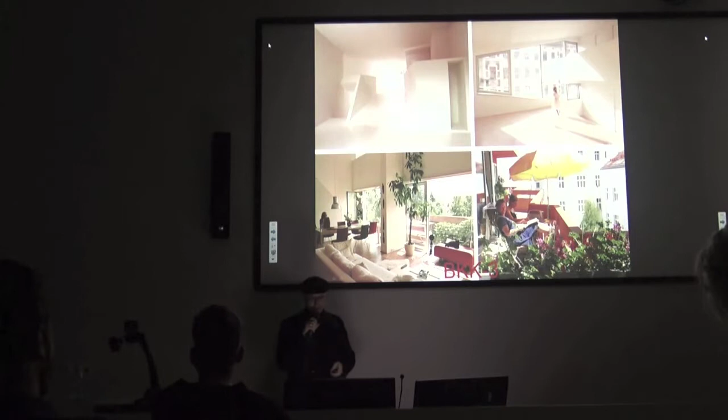So, BKK-3. Okay, so again, it means building collective artist. So that means that we are not only technicians, we are also artists as architects, and so we are trying to focus on things which are not only for function and only for technical reasons. What you can see behind is an overview of projects that we have done in the last years. We have done a lot of housing projects, but also some offices.

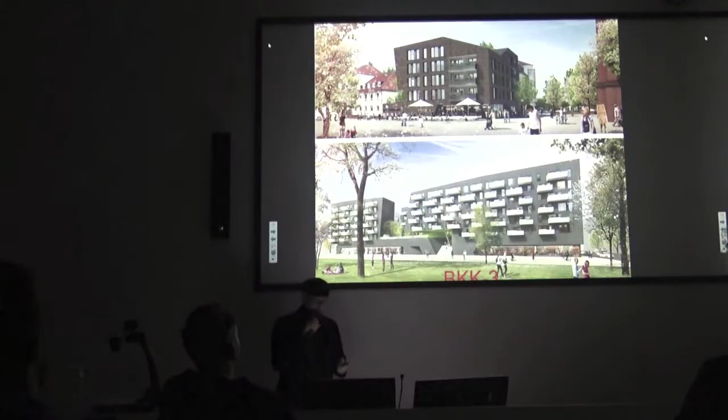So, wohnst du noch oder lebst du schon? This is from IKEA, and in English we don't have words for wohnen and leben, because it's always live. In Austria and in German we have 2 words for them, and it means the difference between only living in your flat or living in the city. And that's the point behind IKEA. And what we are talking about now is to live in participation, to live in community, in communication with other people. So it's about community.

So if you like to develop any project, you need a place, you need an idea, and you need money. These are the 3 points. If one of them is missing, you cannot start with your work. And mostly when the clients come to us, we have a place, we should develop the idea, and the money is then from the client. So this is the triangle which we're working on. And the Sargfabrik, this is our, should I say, famous project of the last 15 years. It's a participation process, a project which we developed together with up to 100 people.

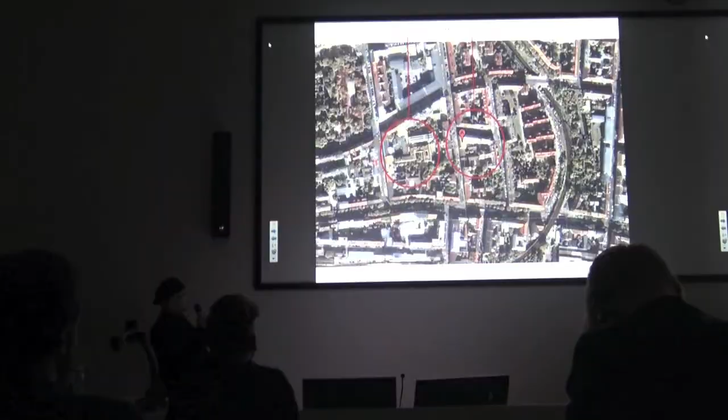Here is the first part of the Sargfabrik, and this is the second part. This is the Sargfabrik, and this is the Miss Sargfabrik, because it's on the Missindorfstraße, that's the address, and it's also clear that it's the daughter of the first Sargfabrik. Altogether, we have spent about 80 million euros.

We have about 110 flats, and the inhabitants, the tenants, are about 220 people. So we are quite a big group, and that leads also to some advantages if you like something from the city, or if you like to do something or to buy something.

So what you can see here is the old Sargfabrik, the first part. It was finished in 1996. Here you can see all these flats are maisonettes, about 2 stories. The next level is then here, and these are also like single houses or row houses sitting above. Then this is a bridge leading to the other part of the Sargfabrik.

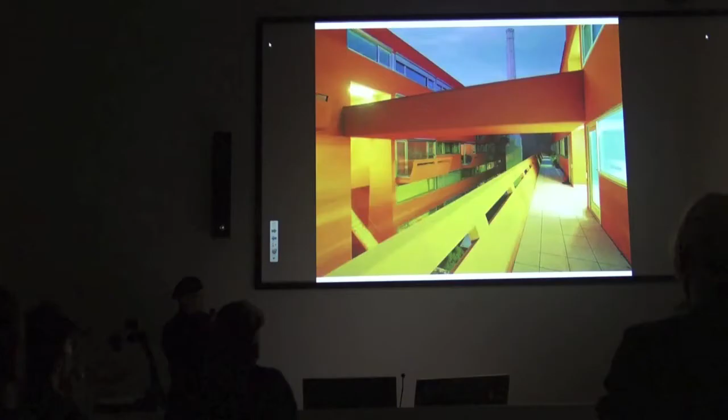So you can see here, this is a picture—please remember, I think this was in the first year when we moved in. I will show you the pictures after 10 years, how it changed and why. You can see here in the back, this is the chimney, the last old remaining thing we have there. So this is the Miss Sargfabrik.

This is the second part. It was started in 1998 and finished in 2000. So we had only 2 years for the whole planning process with 50 people together, and we learned a lot from the planning process of the first part, to do it better in this second part.

So what is interesting when looking at this section? It looks quite simple, but you can see a sloping floor here, and also here. That was the idea when we spoke with people from the old Sargfabrik. They told us the maisonette is so high, about 5 meters, with a big void inside—50% is a big void. They said that's not social, let's do something more compressed.

So we thought it would be a good idea to compress it by 70 centimeters and raise this up. So we have here 3.20 meters and 2.26 meters in the back, the same as in the old Sargfabrik. We compressed the box we had before, and that leads to this sloping floor.

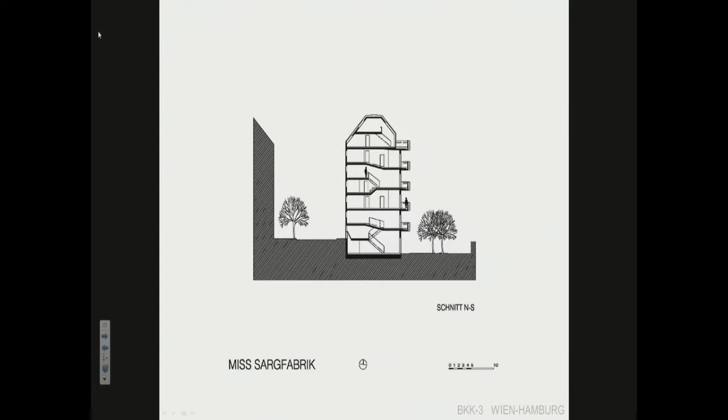The decision is a decision which we made together. And then we did it also here because everybody was happy with the last floor. It could be happen here also. And so that's what was the way to come to such a crazy idea into realization together with the people.

Then we had this idea not to make this dividing walls straight. One of them we broke, so you have 2 atmospheres. The one atmosphere, like here, is a big void in the middle, or big room in the middle, and here you have a space here and a space behind. You can see here you have 3 meters of glass wall, and here you have 6 meters. So they are completely different. When you're sitting inside, they are completely different.

It's like if you have Kochtopfdeckel, you know it, you will ever find somebody who likes this. So that was so funny that at the end everybody was loving this part or this part.

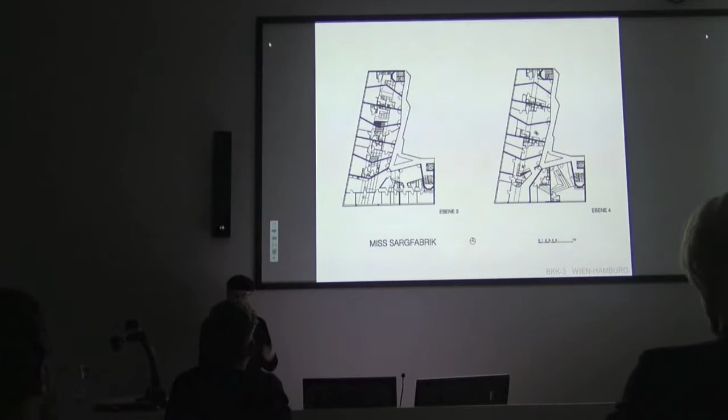So that's what I like to say to you. Diversity is good for all the people. So together with the sloping walls and sloping broken wall and sloping floors, it was a 3-dimensional thing which we could not describe to them.

But first of all, another thing, because the client, our client, the association, likes to have some flats which are very small. And the first which we did was this one here, 50 square meter, single room, loft. Then here, for example, 50 square meter, 2 rooms. Here's one room divided and the rest is open. And here is also two rooms flat, and here we have a 3 room. So 50 square meter and 3 rooms. Who likes to have something like this?

We know it because we got so many inquiries from ladies and single moms because they like to have a cheap flat, but they like to separate from their child, and it's possible here. So the overall rent is about 300 or 320 euros for this, and especially single moms don't have so much money. So they came to us like hell.

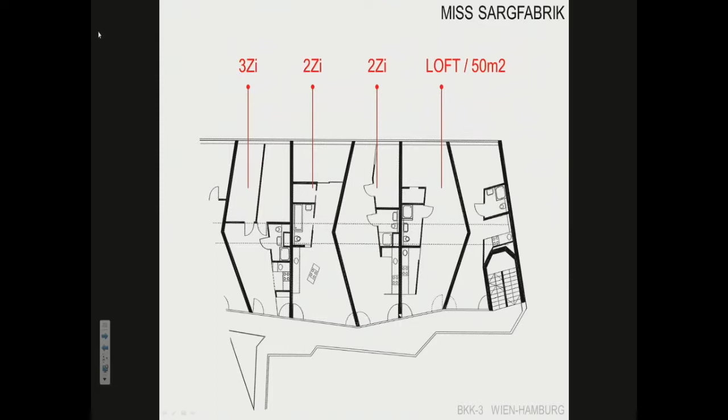So we decided to make an advertising in the Falter, which is the Viennese event magazine, and we gave advertising in it. Miss is searching or is seeking for men because we have too many women. So that was the next funny part that we had when we developed this project.

So when you're thinking about all these sloping floors and walls together, you can see here the overall section, the 3-dimensional, but here you can see how it was the impact on the flat, on the room itself. And it was not so easy to talk with people who never had a study of architecture. When we talked to them, it was not so easy to tell them how it will work.

So we built up models, models that they can look into it, and we have to decide also the floor planning with them. So here you can see maybe one of the flats.

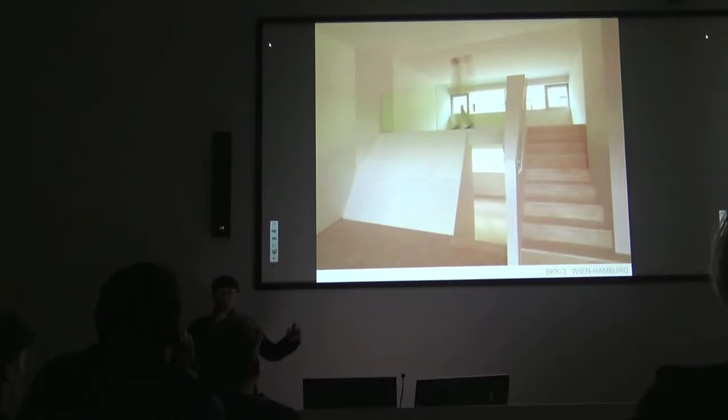We talked with everybody about every flat. So there were about 40 flats, and we have 3 meetings. So we have 120 meetings for this project, and every meeting, let's say, in between 1, 2, and 3 hours. So it's quite a lot of work and quite a lot of discussion together with all the people until we came to the end that this is a project which is fitting for every user.

So every single flat is diverse. We don't have any flat which is the same as any other. And everybody is proud of his own flat, and that's what I always think about diversity, it makes you maybe a little bit more broad about your space and your area where you're living.

So here, for example, you can see the sloping floor is with parquet, but we also have sometimes terraces. We have in the planning process, we had a lot of ideas from the tenants to use this area. This is a flat which is in the upper floor, in the roof. She was very open to architectural ideas, and so we built a lot of models for her.

And she liked to live like on, let's say, a ship. And what you can see here is then everything is done with the Trockenbau, with gypsum plates, and yeah, it's quite an interesting flat. This flat is the one which goes to the Missindorfstraße directly. So you can see here this big space and the big window, and here you can see the principle of this maisonette, which is up here about 75 centimeters, and down here from the ceiling to this part also 75 centimeters.

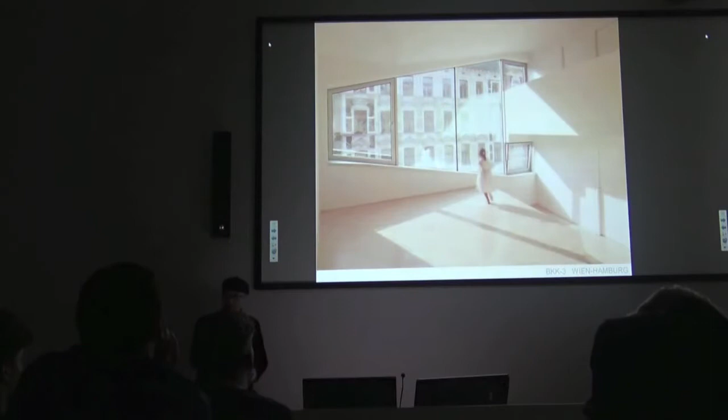So on the outside, we thought all these flats are now like a landscape, and we could do also landscape on the inside. And the special topic here is we are under the earth. You can see here the flat, which is about 2 meters under the earth, and how can I go there?

So we were thinking about a landscape which you can go down. This is the part for the handicapped people, they took this way. This is 10%, this is also 10%. And here is the lift which is leading them up.

This is maybe also interesting because this is a bridge. It's a kind of shortcut, because first we had a development situation which goes around the complete corner, so everybody living in the last flat had to go by in this part here. So then we had this idea of making a bridge which divides the people, so 5 flats are going there and 5 flats are going there.

This is the club room, and you can see it's red painted. We've also designed and integrated a bar. So you can go there, bring your beer, you have water and a refrigerator, and you can start a party. A lot of people, teenagers and inhabitants and non-inhabitants, have been celebrating here the last 15 years.

So when we're going up into the best location, there's the laundry, and the laundry also has a design. Normally you're just putting the washing machine there, but we were thinking about a story: when you're washing your clothes, you go there first, put it in, then you can go up into the library to sit down and read the newspaper. Behind or above the laundry is the common kitchen, and there you can go for a coffee, a cup of tea, or whatever.

So this was the story behind all these sloping ways which are going up. Here we have now 27%. It's not allowed in Austria, and I think in Czech also. So we had this idea, what can we do with that?

So we say this is a sculpture. It's a mountain sculpture because it's so steep, and we brought this into our plans. Then our authority was sitting there wondering what does it mean, a sculpture? And they didn't find something to forbid it, so we have it now.

A lot of children use this ramp for sloping down and running down, and fortunately nothing has happened in the last 15 years. But this is the internal shortcut in between the library, and all the facilities or functions are seen together. They are divided by walls, so you cannot smell the laundry, you cannot smell the kitchen, but you can see everything.

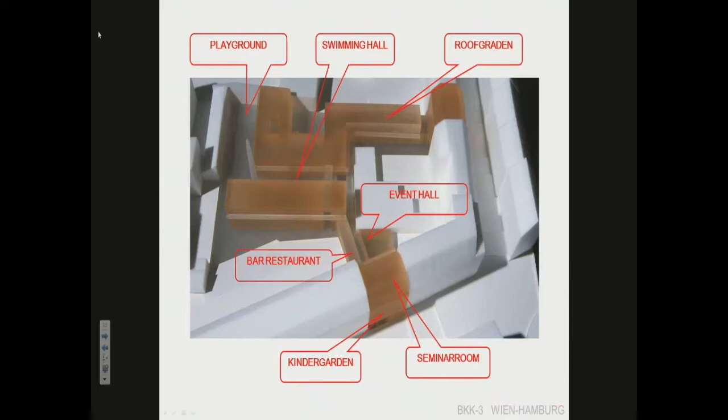You can see here we have a kindergarten, we have a seminar room which is about 200 square meters, we have a restaurant with 300 square meters, we have an event hall for up to 500 people, so that's really a big program which we can run there. We have a swimming hall with 300 meters, there's a playground, and up there's a roof garden, which is one of the interesting common rooms that we have. So, let's see it in detail.

And here is the Schwimmhalle, the swimming hall. The swimming hall is open to 500 people, which are club members. So we don't have the money to have a professional team there. So we say to all of our club members, you have to be one director of the swimming hall, you understand? So we don't have a director, we have 500 of them. And if somebody has to be rescued, everybody can do this. So we don't need an overall overview of this part.

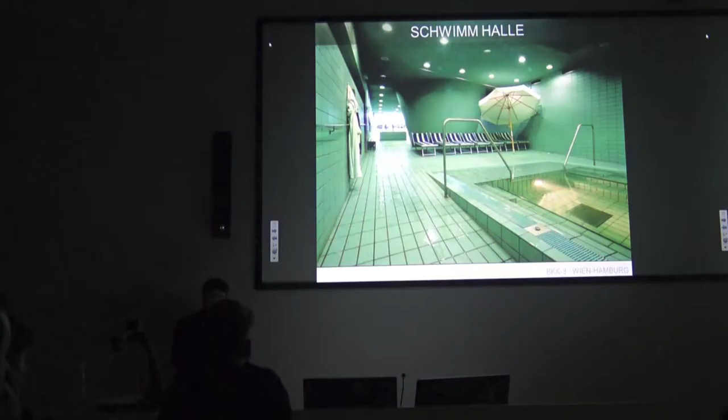So the next thing is then the event hall. The event hall is run by a professional group. We have about 20 to 25 events per month. So we have events every second day or every day, which is quite a lot. Usually you have 10 events per month. And this is run by a cultural manager. He brings all the bands and all the people to us, and you have to pay for that. But we are also getting subsidy from the city of Vienna, like every event hall in Vienna.

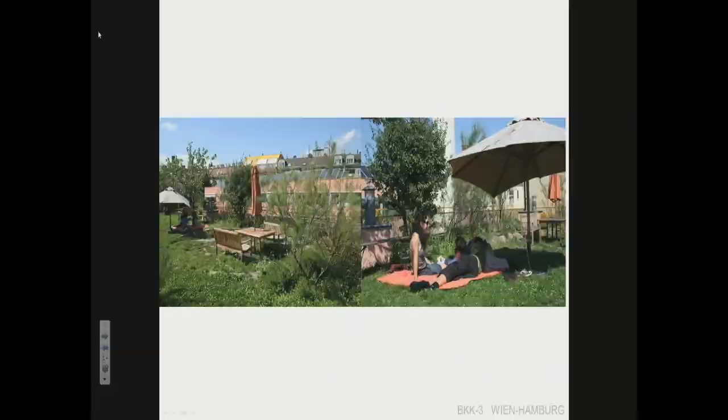And that's a picture from above how it is today. It's completely filled up with the green area, with big trees. They're about 6 meters high and on 30 centimeters of earth, not more.

You know what Feierabend means? It's a kind of celebration every day when you're going from work. So we had our first celebration on the 1st of November, which is a very special date. In Mexico, they are celebrating at the graveyards with the people who are dead. And that was our idea when we made a celebration on the 1st of November.

So this is one of the old coffins that we found in our Sargfabrik. We have it today, and there was a big event with musicians from all over, celebrating in the Mexican style the first day of the Sargfabrik.

So what are the principles, to make a summary? We have bottom-up decision making, because everybody can join the planning process. We have responsibility. Everybody has responsibility for the whole when he makes decisions. We have voluntary rules, so we do not force somebody to do something. They are all doing it on a voluntary basis. And we have cooperative property, so it's not the ownership of somebody, it's the ownership of the whole cooperative. That's one of the principles.

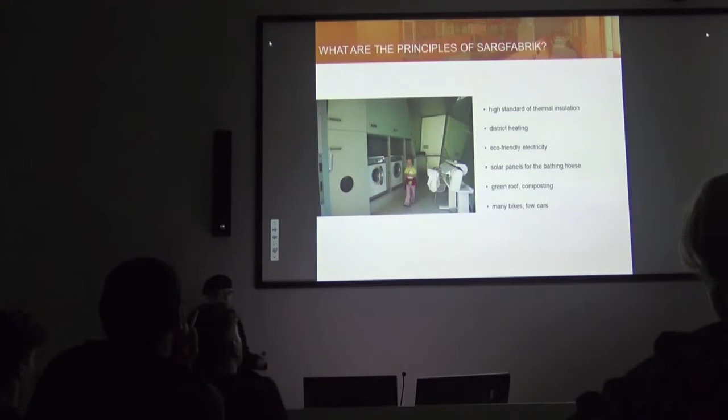We have our own composting system, and we have many bikes and few cars. So I think we are very sustainable, and we are also giving something back to the city with our public common rooms. That's what we think is good when we're getting a subsidy from the city: we like to give it back in another way. So we like to integrate a lot of people and spheres.

We are open to refugees, we are open to every part of society, but today we are of course closed because we cannot expand anymore. We cannot build a skyscraper, unfortunately. We have a lot of inquiries, but we haven't found a place to expand. And we like to integrate these separate concepts of participation, planning, and avant-garde aesthetics, which can be merged together.

So we're coming back to social housing again, but I would like to introduce a small single-family house for a friend of mine. When you're planning for a friend, it always means you have a lot of responsibility, and most friendships end after the planning process. I don't know why, but it is so. In this case, he is still my friend.

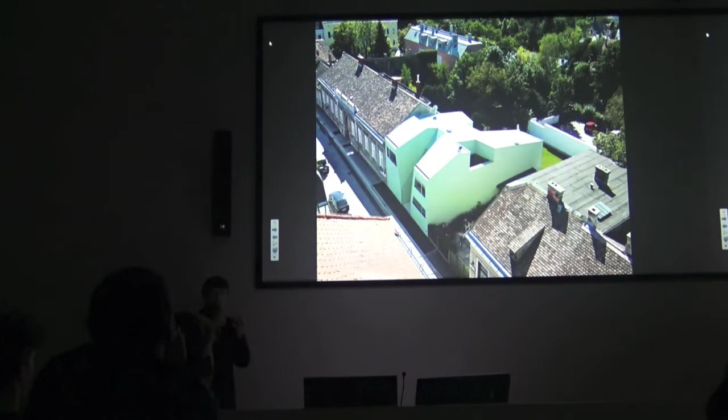So they were very in favor with this idea, because we have found an old structure which was in the city before. So this is the way then through. It's a small, narrow way which leads to the door. And on the other side, you're coming out here. So you have on the left the living room, up there are the sleeping rooms. This is a room for the parents, and up there is the sleeping room of the owners. It has about, I think, 240 square meters overall area.

And on the inside, the lady of the house told us she liked to have something where she can oversee everything which happens on the street, in the house, and in the garden. So when she's here in the kitchen, she can see on 3 sides everything that's happening. So we fulfilled her wishes that she had.

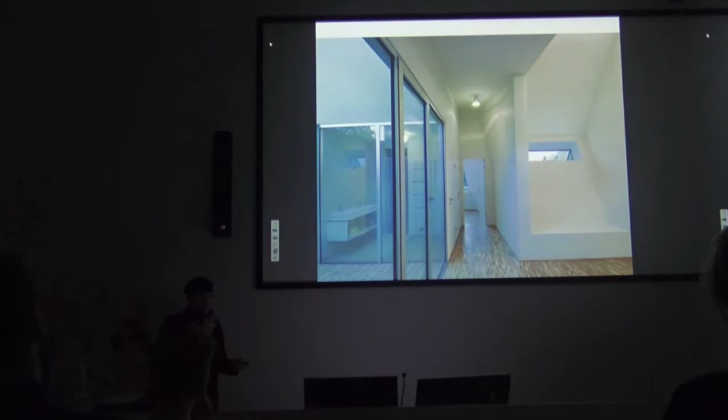So in the upper floor, they didn't have any wish for this thing you can see here. But at the end, we were using this as a library. Now there are the books inside, and it's the in-between connection between the 2 parts of the building. So this is the way looking right to the street. On the left, you can see the bathroom, which is into this inner courtyard. And so they have a lot of light and a lot of sight and transparency when you're coming up into the 2nd story of this building.

So that's the front. Also funny story, when we built this up, the neighbors were coming to us and asking us what are we doing here? This cannot be a house, or what is this? And then I told them this is for a family. And then the neighbors said, "Oh, okay, now I understand. So when they get divorced, the one will get this part and the other one will get this part." So people have such pragmatic ideas.

So let's go to the Vorgartenstraße. The Vorgartenstraße was finished in 2012, so it's quite a new project. And the aim that we had there was to have a cheap rent. It was a competition. It's called Bauträger competition in Vienna. So you go in with one association or with a cooperative into the planning process, and then you're presenting this to the city. And the city has a jury and will judge the best project. We have won this because we have a lot of quality.

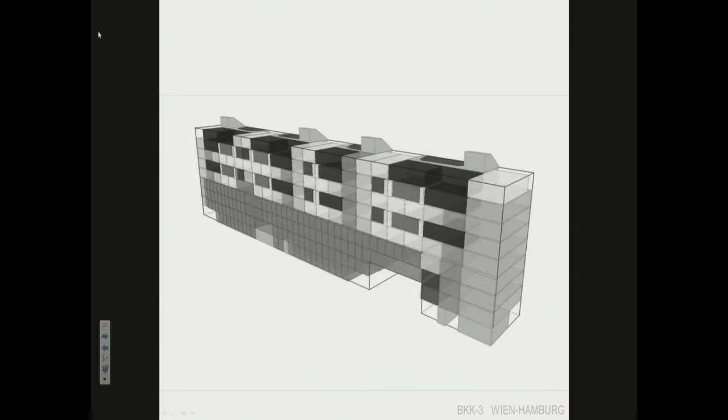You can see they are quite different because it's a very complex system of flats. All the flats have orientation to the south. Most of them stick through the whole block, and they have a big area in front of it.

So the average size of a three-room flat in Austria is about 75 to 80 square meters. So we thought the only way to lower the rent is to compress the floor plan, to compress all the functions, and that leads to this flat, which is now 66 square meters, maybe 10 square meters less than normal, and that means you have less running costs, you have less rent, and so I wrote down what you have to pay.

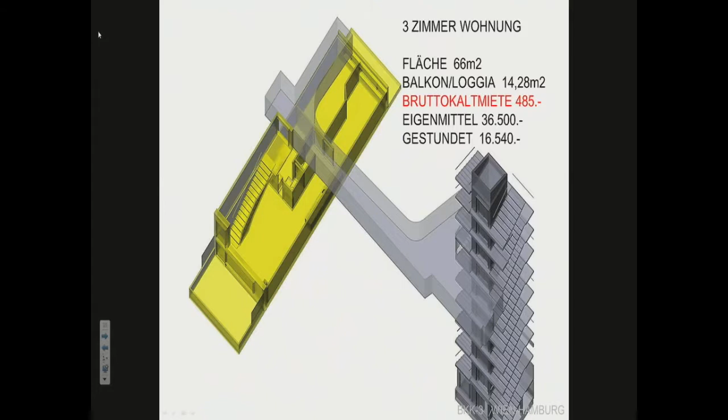The Brutto-Kaltmiete, that means the overall rent with all the running costs together, but not with the heating system, is 485 euros for a three-room flat. You have to pay Eigenmittel of 36,000 euros. You will get it back when you're moving out. That's quite a lot. But it can also be deferred, gestundet, then you have to pay less, and you pay it later on.

So, 66. We know from the Sargfabrik that you can do something with 50 square meters also. You can do a three-room flat with under 50, and there are a lot of people who like it. So we decided to do this again, like in the Sargfabrik. So here we have 52 square meters for a flat which has 2 completely normal rooms. This is for the children, this is for the parents or for the single mom. And here you have kitchen and living together, which is not so big, of course.

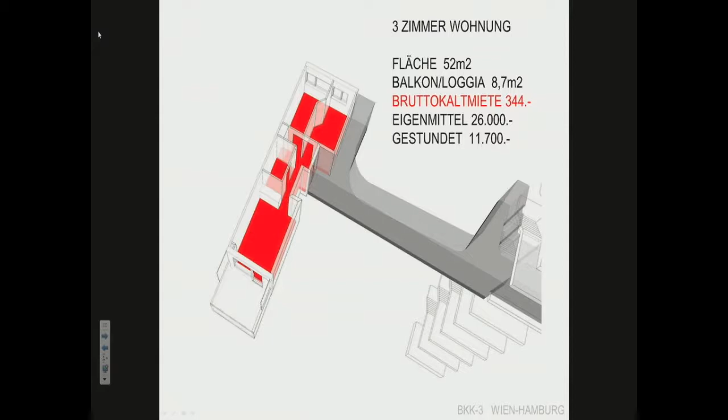But you can see here, this area is up to 3 meters, and that's quite a lot, which is in direct connection with your flat. And you're paying 340 euros for that. And of course, Austria also has some poor people, and they need it. So these flats were rented out in 1 or 2 days. So there's a need for this special situation.

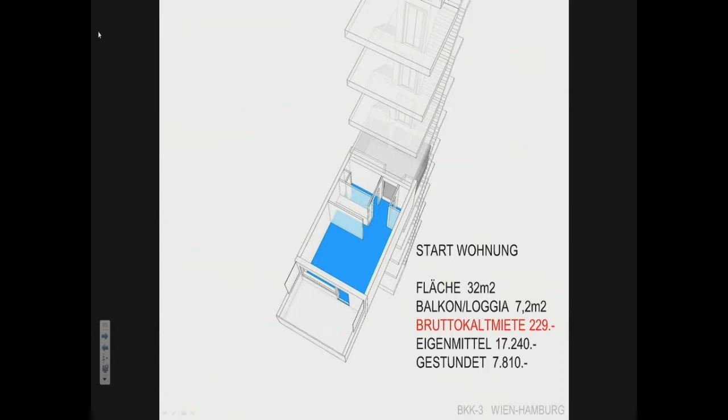And then we had to do the Startwohnung, the start living unit, which is for students or for young people who don't have so much money. So this is only 32 square meters, and it's only 229 euros. So this is comparable a little bit to the student's home. Or it's less than a student's home, but in a student's home you have a cleaning lady, you have internet, you have the big kitchens and so on.

So additionally to these flats, we decided to make what we called working spaces. The working space is just opposite the flat. So what you can see here, the gray area is the entrance to the flat. And on the opposite side, you will find these two working spaces. You can use this for your hobby. You can use this as your office.

You can use it for your teenager, to put the teenager away 2 meters. And the teenager can come for eating, but they have their own single unit, which is directly by the parents. Sometimes it's better. So you can use it for everything you like. It's additional. You can rent it additionally to your flat. They were all rented out immediately.

We have about two of these per floor, and on one floor we have 8 flats. So for 8 flats we have 2 additional rooms, and they are very cheap. It's about 100 euros. Of course they are very small, and you can see here this is the bath facility, and the rest is just an open space. So you have a toilet, you have a shower, and you have a washing facility, and that's enough to put your teenager there.

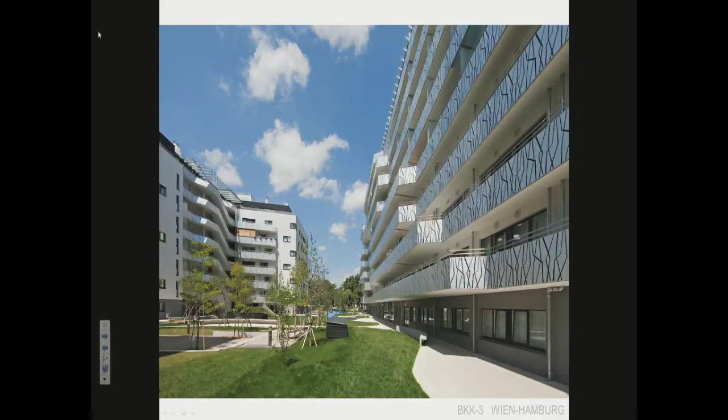So how is it going to look on the outside? The whole building is 128 meters long. It's divided into a building which is standing alone, and this one which runs along the street for 120 meters. So we thought about how we can make a sculpture out of the facade, and this leads to this form of balcony, which is coming out and going in. So here you have 3 meters, there you have 1.50 meters. So it depends which flat you get, how deep your balcony is.

Up to the 4th story is the student's home. So you can see here on this side where it's a little bit wider, we have the common kitchen. I will show you a picture there. We worked together with Dr. Karin Standler. She has done the landscape plan, which is of really good quality. Also now, after 3 years, it's getting better and better.

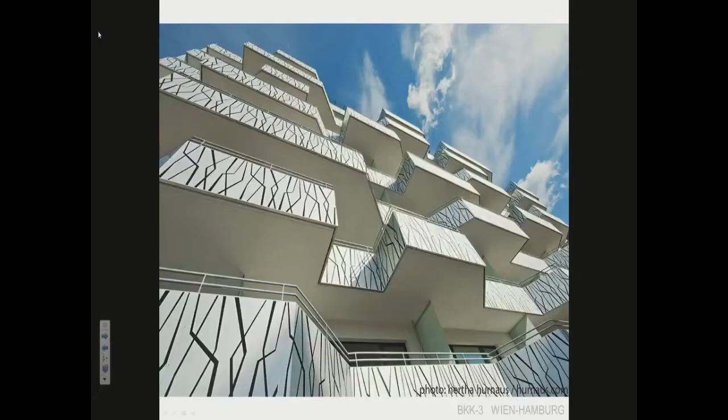This is the south elevation from the part which is standing alone. You can see here there are a lot of different balconies. So each flat has a 1.3 meter part. That's why the sculpture is so moving.

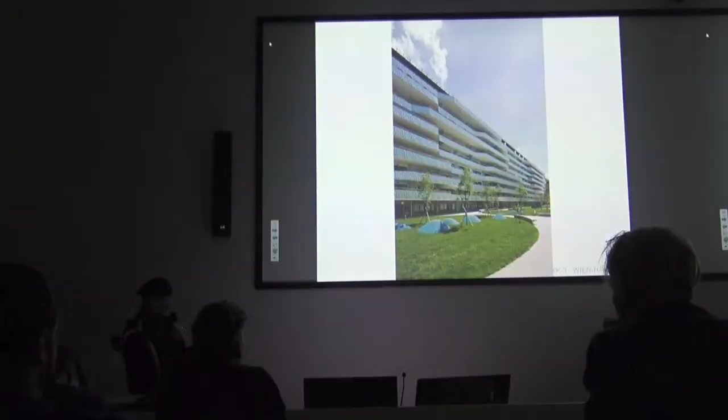Nowadays we have big trees there. This is also a very nice photo where you can see the shape of the form and the shape of the landscape. So here is the sand. There is a hill which is 3 meters high, and you have to think about it that behind or under this earth there is the garage. And when you're putting 3 meters or 4 meters of earth above, then you have to do something in the garage, because it's really quite a lot of tonnage of earth.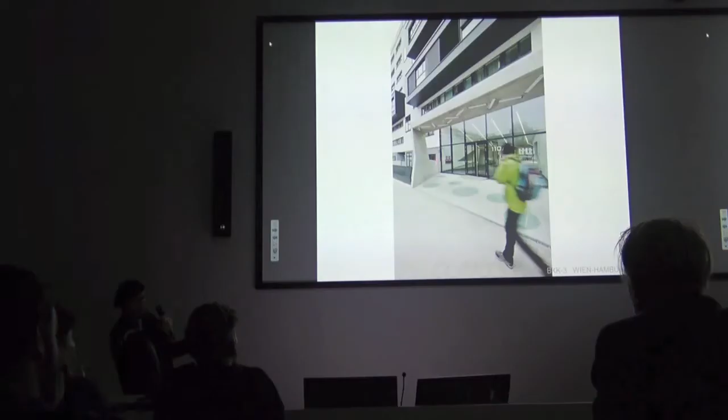Yeah. So now we're coming to the student's home. This is the entrance. The entrance for a student home can be a little bit better, a little bit more beautiful, a little bit fashionable. So we decided to do this 2 stories high when you go in, and then on the inside it goes down to the normal height.

So we could spend a little bit more money than normally in this space, but we had to fight, for example, for these lights. They cost about 10,000 euros, and we had to go to everybody to talk about this 10,000 euros, and the whole project was 22 million. And after 1 month of lying on our knees, we got it.

So then we had this idea: what can we do for the people to sit down? And we had this idea to copy our column and to put it down on the earth. This is out of metal, because it's not possible to do anything which is flammable. It's a question of fire protection. And so we did the place to sit down in the same way as the column.

Here is the lobby, where the housekeeper is inside there. And that's, I think, the Visitenkarte of the building. When you come in, you should see the philosophy of the house. So, how it's going to look like then above in the student home.

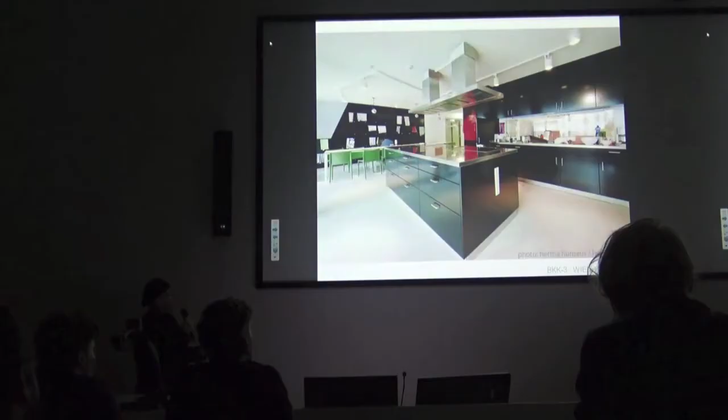We have a big modern kitchen everywhere. They are very open, very transparent. They have a lot of light inside. This is the washing facility. Behind is the kitchen itself. There are the storage rooms of the students. We have done all the interior design.

Then when the offers came back, we had 1.5 million of interior design, and our client told us 1 million is the maximum. So we had to decide then how we can save 500,000 euros, and that leads to these black plates, which were much cheaper than the white ones.

There's every luxury thing inside. Big flat screen TV. I think there are 3 ovens there, more microwaves, and everything you wish.

This is then one of the rooms in the student home itself, and as you can see here, we saved this plate. We left it away, and I think it cost about 50,000 euros less, because when you have 200 of them, it adds up a lot.

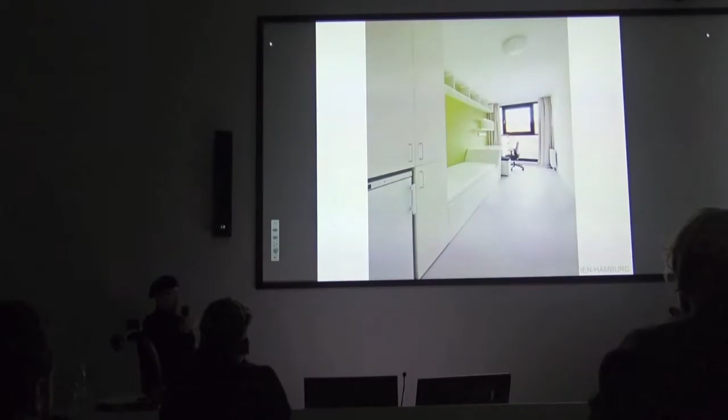But at the end, I have to say they are very modern. They are quite interesting, and I talked with a lot of the students every time when I have a guided tour there. I ask them how they like it, and they found it quite good.

So they will get a chip, and with the chip they can go in. They have reserved time for that. They cannot do this the whole day. During the day there are more students there, and in the evening there are other people from the house.

When you're building a social house, you have to fulfill the cost regulation, and the maximum for this project is 1,330 euros per square meter.

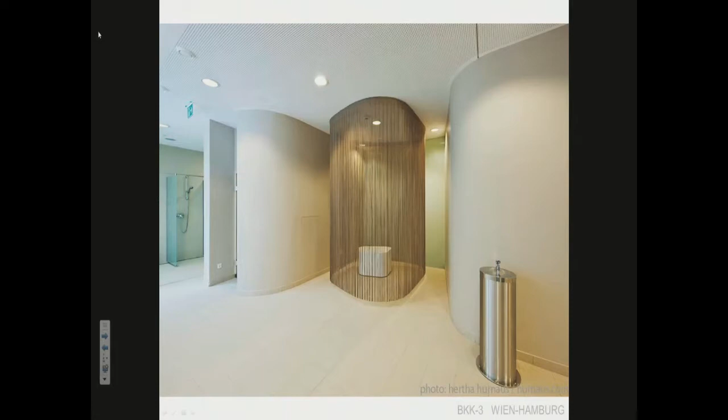That's quite cheap, I would say. But we're thinking about how we can act, or what we can do with cheap materials. So this is a gypsum plate, which is hiding the cabin of the sauna. This is a kind of curtain, which costs about 10 euros per meter, so it costs nothing.

What we invested a lot of time in was the colors. The poor painter had to do, I think, 10 different colors, because I was not satisfied. But at the end it looks together like a sandy atmosphere. So it's done in a cheap way. We found a way to make it cheap.

The most expensive thing here is this one. It cost about 3,000 euros. This is really special because it's a special form. So we spent a lot of money for this special form, but at the end you can see it. That's the point where it breaks, where you have the feeling, okay, they have done something luxury.

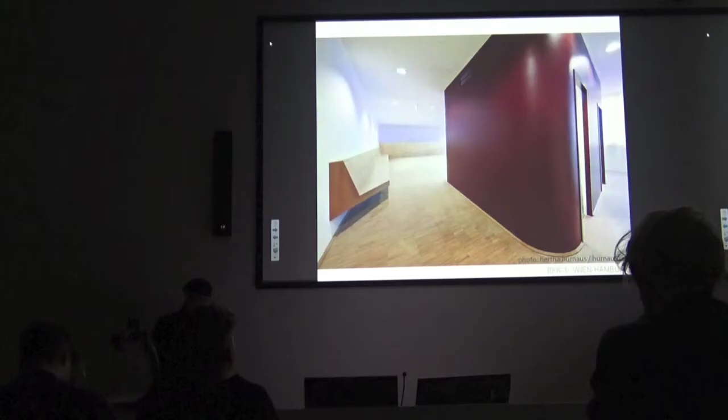So let's go to the next project, which is about Smart Wohnen. Together with the city of Vienna, we developed a program after this project, focusing on small flats. This is the Smart program, and our aim in this special case was to make a lot of social diversity, urban porosity, so that you can go through the project and pass by also when you're coming from outside.

It's a big scale project, about 30,000 square meters, so it's possible to do this within the regulated costs, and we like to do a landmark building.

So what is the Smart program? Type A, one room, is maximum 40 square meters, always including loggia. The next, two rooms, is maximum 55; three rooms maximum 70 square meters. If you have a loggia with about 5 or 6 square meters, you have to lower this. So then the maximum of type D is 80, and type E is 100 square meters.

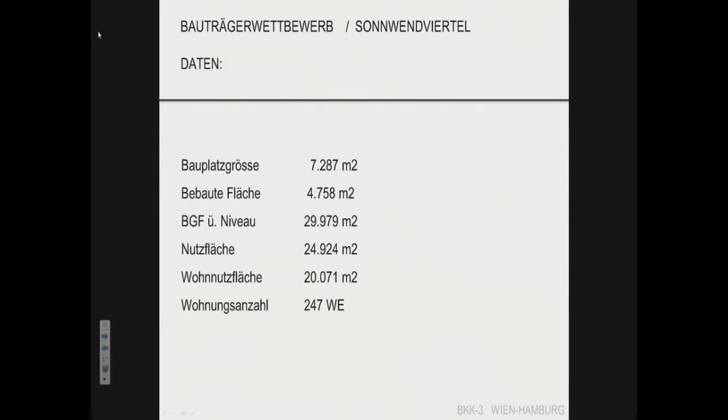The place is directly on the Sonnwendgasse, which is now the last project. This is the school from BKK, and all the other things are new but ready and finished now. So when our project is finished, the whole Sonnwendgasse is ready.

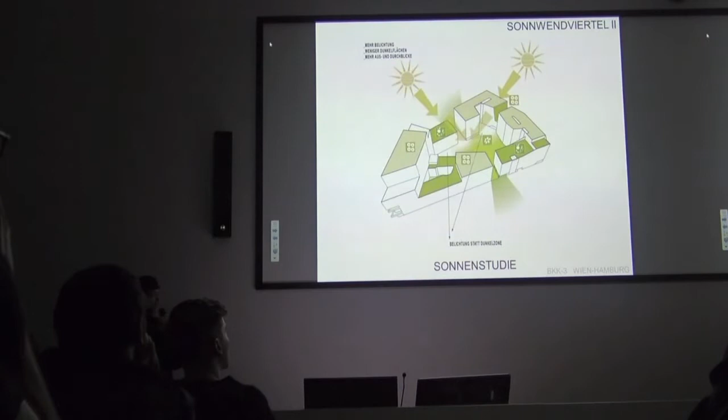Why did we do these different heights? The different heights are coming because we like to have more sun into the block. The block is very narrow, so sometimes we go up, sometimes we go down, like here and here. Also this part here, where I can look through from the west side, gives you more sun into the block.

You can see here also the porosity. You can go through — it's open to the public, you can pass this. Here you have the seniors home, and here you have Wohngemeinschaften, betreutes Wohnen.

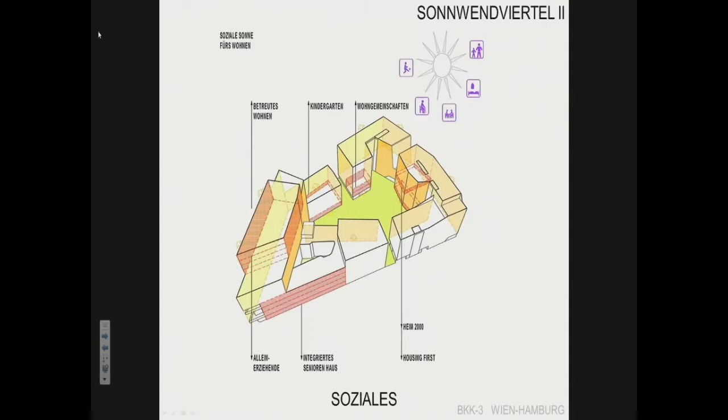There are the kindergarten, the Seniorenhaus going through the whole area here. This is our part down with a lot of flats, including the Heim 2000 and Housing First program. We have the Caritas, and you can see a lot of shops which are going directly into the Sonnwendviertel.

So how is it going to look like on the inside? At the end we have a corridor on the inside, and we have flats oriented to the courtyard, and flats oriented to the other side. Because then you can build very deep, and if you're building very deep, you can save money. That's the factor.

So now we're coming to the really small units from the SMART program. You can see here, this is a SMART living unit with about 50 square meters, including the loggia. And this one is only 48 square meters, including the veranda. So you can create very special situations even if it's very small. You have to think about it.

And also this 69 square meter flat is fully usable area. Maybe it's not so wide here, but we have some other proposals also, so you can see here.

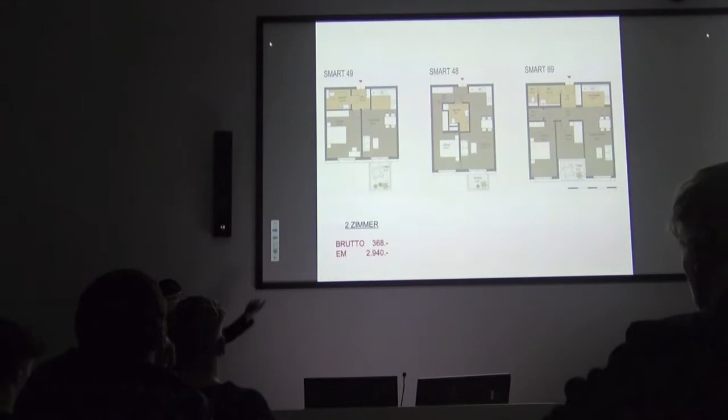One impact of the SMART program is now that your Eigenmittel, what you have to pay to the association, is only 3,000 euros, and the rent is also very, very cheap. So this is what we offer to the people, and it's so cheap because the public subsidy system is subsidizing this project.

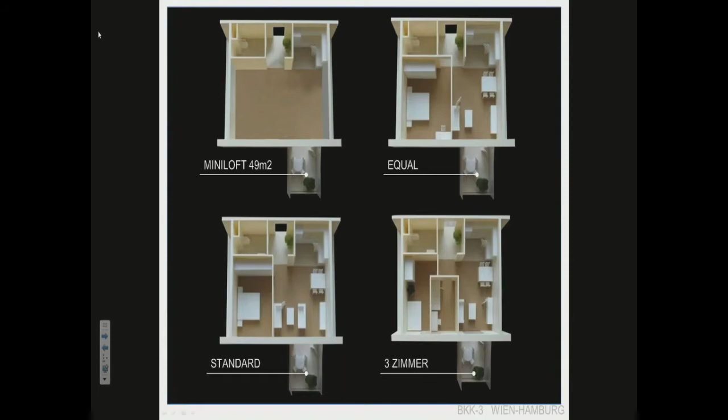So it's also possible to change this maybe in 10 years or 50 years, or you have a child, and when the child is moving out, you can go back to the old version. So it's also possible to have an optimized layout of the floor plans, but also flexibility.

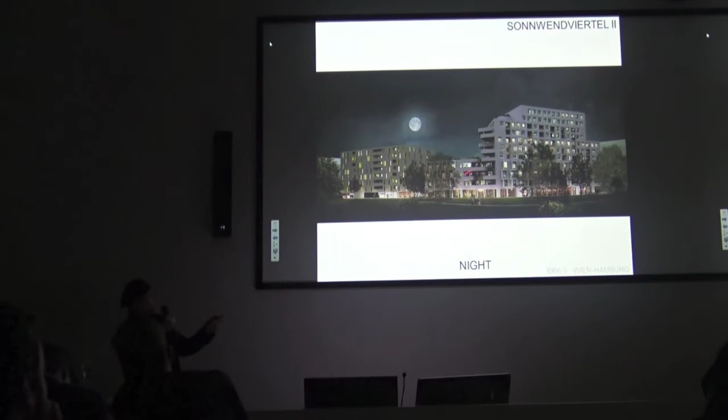So this is then the view from the side of the Sonnenpark. This one is from the west. Here we have some kind of green wall. And this is then at night time, together with Rüdiger Lainer's part.

So the next project is then in Hamburg, which is so new that we just started the construction work last week. First of all, in Hamburg we have very bad ground, very bad earth, so we have to stick in 700 Pfähle, so we need now 2 or 3 months, and after the winter we can start really with the construction work.

So what was the aim there? We like to focus on diverse flats, really, because diverse means subsidized flats, which are subsidized by the city of Hamburg. Then low-priced flats, which are not as low-priced as subsidized, and free-financed flats, which are the expensive ones. So we don't have only subsidy, we have all together, and they are all together in different locations.

So we also have a participation group included, like in the Sargfabrik, which has about 50 flats. We have to integrate shops with 2,000 square meters, and our aim was to make possible the interaction of the tenants on a level, on the upper level, which I will show you next. So where is the location? It's directly at the Karlsbau Park. You know this building?

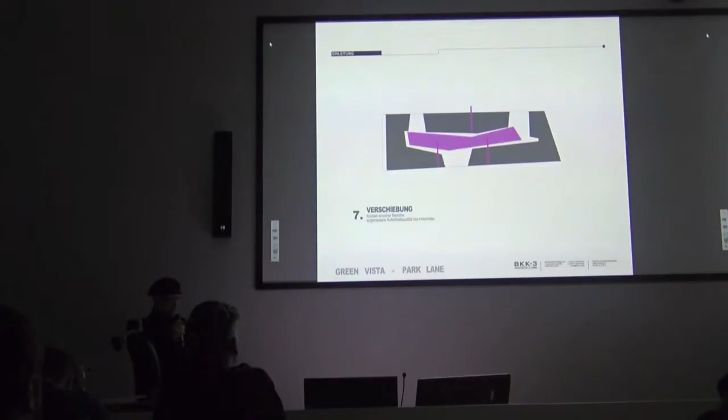And we were focusing on giving most of the flats a good side to the park, because directly in front of them is a very good park with a lot of green areas, and it's a very special topic. So you can see here, this is the best location, and also this one, because they have direct sight through the building to the outside.

So how it's going to look like, you can see we are working together with 3 different clients. One client is here, the participation group. This is a client for the free finance, and the little one is an association which is very famous in Hamburg.

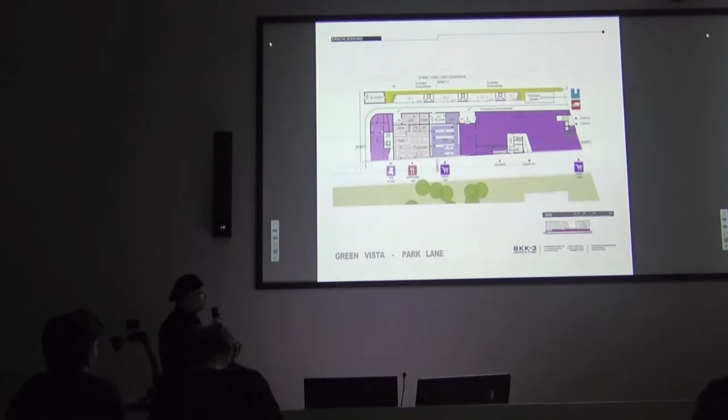So this is the ground floor. You can see here the area of the shop area. Here is the kindergarten, here is gastronomy, Einzelhandel. So we are speaking about 2,000 square meters in the ground floor.

And on the upper floor we are trying to connect all the buildings with a single level, and we are calling it the communication level, because if you like to go up, for example, this elevator has its last stop exactly on this area. So you have to go to the 6 meter level, and then you can enter your house.

That means that you will meet all the people. So this is a lively space, and this is also a green area which we like to enhance with some cherry trees and so on.

So you can see here we have 7 stories up and 1 big story for the shops, and that's how it's going to look like. It's a very sculptural building, because it's divided into these 3 parts, and we have a planning duration of about 2 years, and it looks now, I would say, the same as on this rendering.

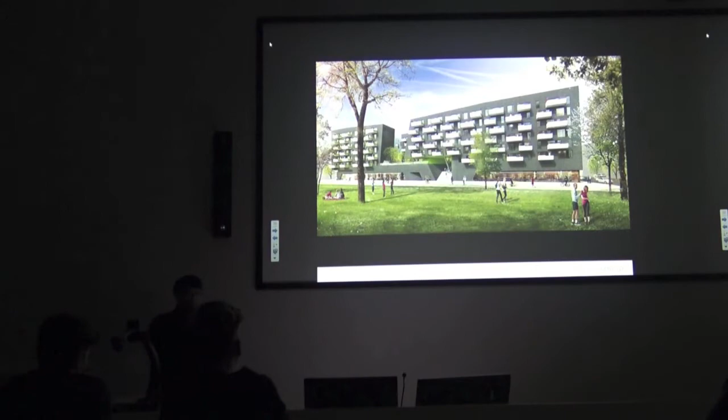We also have to deal with the city of Hamburg, because we have a black brick, and you have to understand bricks are so special in Hamburg, because that's what they are talking about year by year. So if the brick has a little difference, if it's a little bit lila, if it's a little bit red, if it's a bit blue, is it metallic, is it shiny, is it rough or not, you can discuss for years only the brick.

And we have to discuss it with the city of Hamburg, because they are ruling this. Jörn Walter is the big chief there, and at the end he agreed, not to exactly this color, but it's a gray one with a little bit of brown touch.

So yeah, 2 years of work, and I would say about 20 muster, also samples.

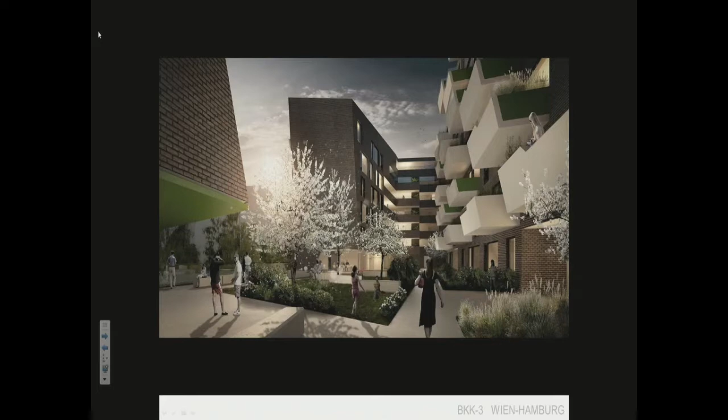So we also included a Gemeinschaftsraum here, a common room, which is orientated into this area here, so we hope that the people will join together. We don't know if it works in Hamburg because people are different there, but we are giving them the opportunity. So they have then maybe 50 years or 100 years to enjoy this or not.

So what is the summary of all this project which I have shown you? We are focusing on a human being. We are focusing on a man, and we are focusing on the people. Yeah, that's very important because that's the user then at the end.

We try to support community in every way possible. We also support communication, by the way, not with the sledgehammer. Always by the way, one of the best communication points is, for example, the roof garden of the Sargfabrik.

Because on a normal day everybody goes up there. They have to water their plants, so they are meeting each other and talking about the last chats, which are interesting. So we are focusing also on diversity and on density.

We are not afraid of density. It's always a question or a matter of how to handle it. We like to make the lowest energy consumption possible, and at the end it should lead to fair rents, and that's possible with the city of Vienna, because they have the subsidy system, and I think that's in Europe, there are not so many countries who have had this for the last 100 years.

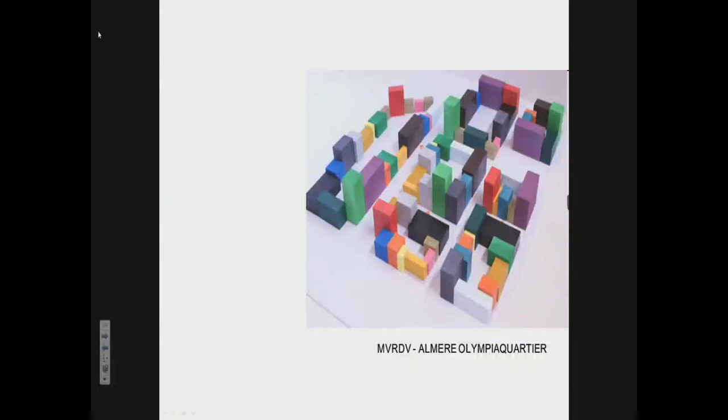So now about urban planning. Urban planning is something which, when you're thinking architecture not only for the site and only for your building, then it leads very easily to urban planning. And that was why we were invited to Almere, because in Almere in Holland, MVRDV has done this proposal for a big new city. And this big new city follows some rules. Every site, which is very different, has its own rule.

For example, this one, let's say 12 stories, balconies are allowed. This one, 5 stories, balconies are not allowed. Or this one here, you have to implement a garden in front of it. So every site has its own regulation. So the book of the regulation was about 300-400 pages, and they invited then 30 architects from all over the world, and we got this one here, which was a little bit small, about 1,000 square meters, and this one here, which is about 5,000 square meters.

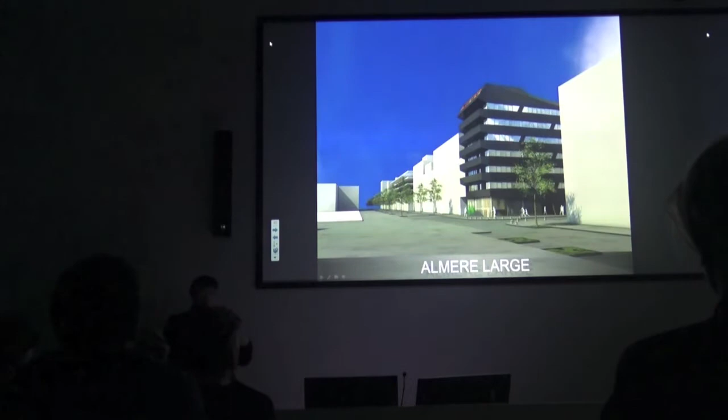And so we did the complete development. We went to Holland. We dealt with all the consultants that you have, with fire protection, with statics, and so on. And we did a project which was then completely ready to go to building, and that was then 2008. And you know what happened then? All the banks were going bankrupt in 2008, and this whole project was quit completely.

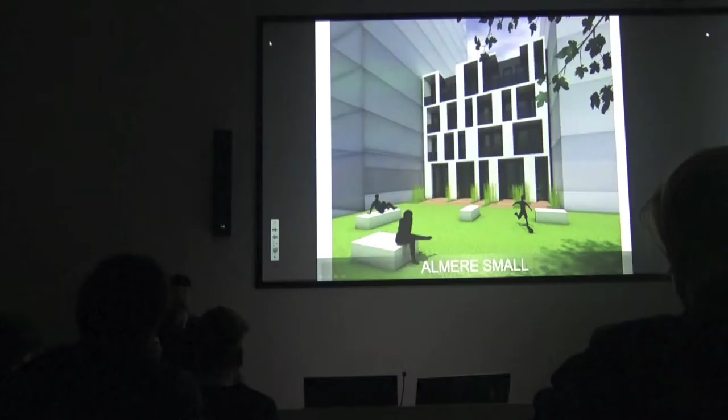So the next thing is then the Dragoner Areal in Berlin. It's an old Kaserne building from the military, and it's this part here. It's a big landscape, about 50,000 square meters, and the aim was to get more than 100,000 square meters. That was the wish of the investor, and of course we don't have any problems with density. We told them it's possible, we do it.

So what have we done? We demolished some of the old buildings, which are in a very bad situation, and what was then open, we tried to make new buildings there. First of all, we did something like a Baufeld, a quarter block, and some streets. The streets are mostly for pedestrians. Only some of them are a single street. It's possible to go through, but only to make a delivery, not all the time.

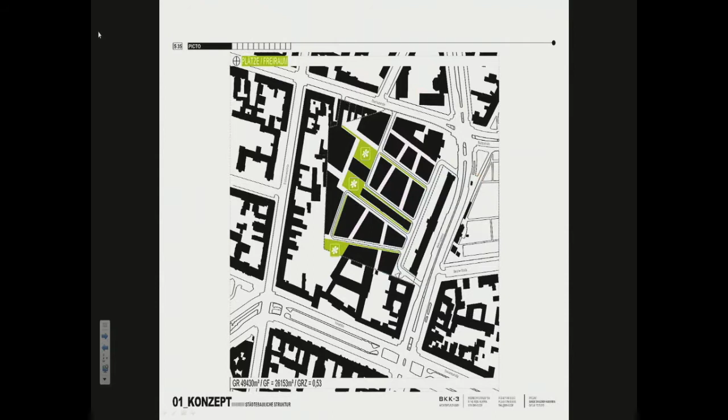So then we did some green areas, some parks, which we were locating behind this old factory. This old factory we are using as a kindergarten. It's a very nice brick building, and here is a big garden together with the Amtshaus of Berlin. So these are then the zones in the ground floor, where we'd like to have some shops. We'd like to have some Gewerbe.

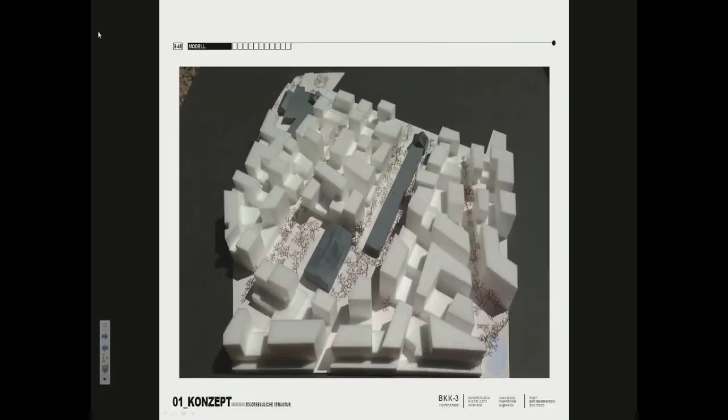And then we make some kind of algorithm, because in Berlin it's necessary that you have enough light for every flat. And every time when we have a big building, behind we have a small one which will make the light then for the next building. So at the end it's looking very complex, because every flat has to have enough light, and it's like a dense city, like maybe a rental city, and that's what it could be then at the end.

So everybody will get a site, and the site will then have other architects, so they will use another form, another architectural grammar. This is the kindergarten, here is the park. This could be also a higher building, when you have enough space, I think it's possible. It was a very nice rendering. At the end, the investor broke down, and now they don't even know what to do with the site. We are in touch with the people there, but we don't know how it's going forward or what will happen in the next days.

So then, after this, we got a lot of cooperative planning. Cooperative planning means that we are sitting together with a lot of consultants and experts, experts from landscape, traffic, noise, together with the people, the neighbors, with the city of Vienna. So usually we have about 10 or 15 people who are discussing the urban planning of a big project, let's say about 300 units up. And this, for example, was one of these projects.

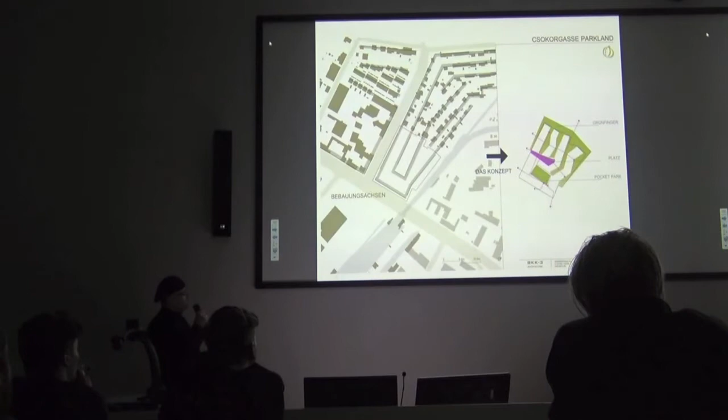So here you can see the old structure, which is some kind of rows, which we were reacting on. And so we were able to plan here more than 300 flats, 350 flats, together with Hermann & Valentiny. Here you can see the concept. We have some place, we have a park, and some green areas going right in between the buildings. This is the urban planning situation. We have a modulation of the height, so it's not on the same level. We try to involve green areas on the roof, and all together leads to a very different planning of the whole situation.

From every side. So then we have the cooperative planning of the Seestadt Aspern. In Aspern, together with the architects, we developed 1,500 flats in 3 years. Before there was nothing, only Pampa. And so we were sitting together. This is our client, this is our next client, one of the architects, Superblock, also architect, landscape planner. And on this side, what you cannot see, was Tovatt, the overall designer of the master plan of Aspern, and we had to discuss our proposal with him. Sometimes it leads to heavy discussion.

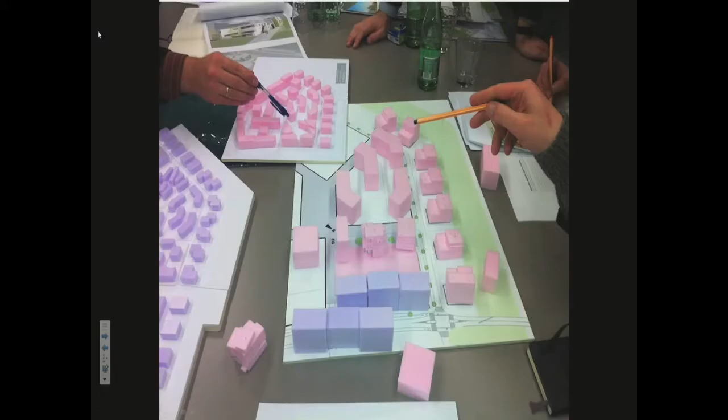So our Baufeld is this one here. This is our block, this was the next block, and also this one is our block. And so we could react together with our neighbors. That's quite interesting when you're developing a city, that you can react with your neighbor. That could lead to a special balance of good places. Most of this we discussed with a model, or also plans, of course. And you can see here now it's developing further. It's looking very different.

Oops, not so fast. So here we are. This is our neighbor, and what you can see here is BKK. They did a very famous project. It's very dense. Maybe we can invite them next time, because they're really interesting architects. And our aim was to do this on an upper level. That's the next point then, and to make some kind of Stadtvilla.

And this was then the last project which we were presenting to the city of Vienna, because they also worked with a jury to control our work, what we have done together with 30 architects. So this was a big cooperative planning with a lot of architects. So everybody was very happy then about the success. This is the jury, and all the others are so happy that it's done.

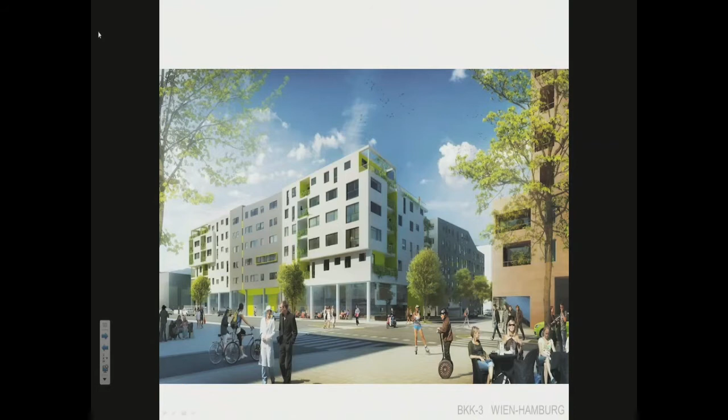even the cost of this project were down under all the others. So here we're speaking of about 1,280 euros per square meter. And if you're planning good and in good collaboration with the construction company, then it's possible. But of course we have to discuss everything, and if something is costing 500 euros less, they came to us asking, can we save 500 euros? So at the end it's very similar to the renderings.

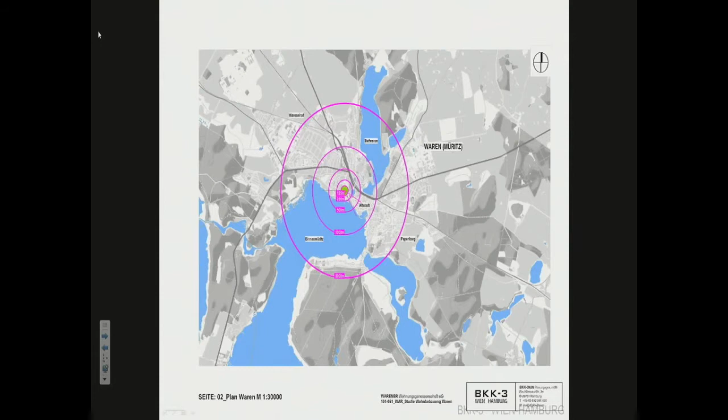So one of our latest projects or proposals for a city is then in Waren an der Müritz. It's in Germany. A very small community. I think about 20,000 people are living there, and we try to make on this area a new development with I think 50 flats. So first of all we did a raster, and then we were cutting something away so that the blocks could have more light into it.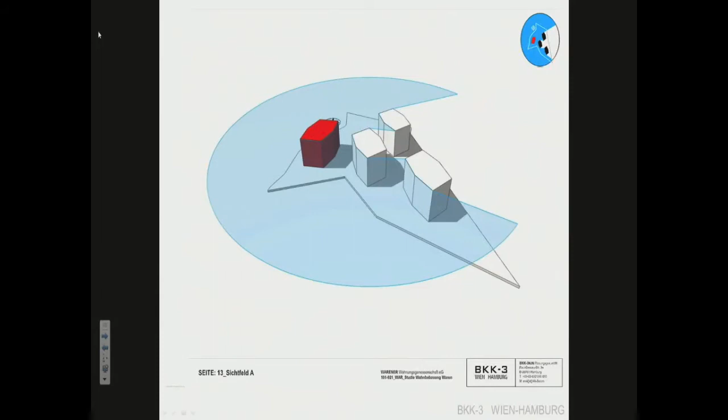Then we turned them, and for every villa we did this kind of side parameter, what you can see. Then we lowered down the roof, and at the end, here it is, the rendering. At the end there were 4 villas which are standing together. Each of them turned so exactly that everybody has the best location possible. Of course, it's not possible on every side to do it.

Okay. I don't know what it means, but it's turning off. Okay, in 10 minutes. That's quite unfair. I guess we can reboot and continue. No, it's the system, that's clear.

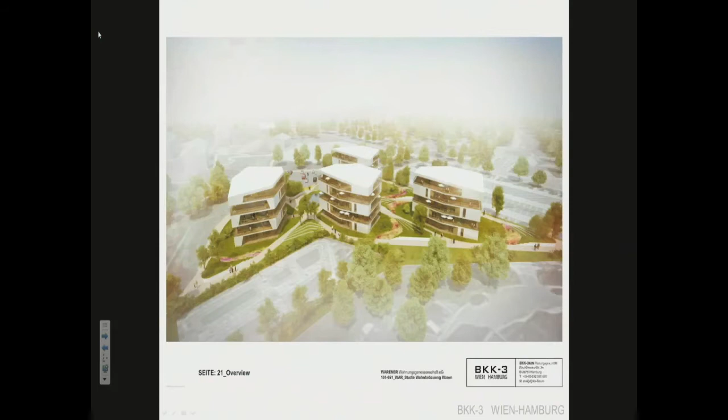So that's how it's going to look like, but I think I'm quite at the end. Sometimes I have some projects which last for 2 or 3 days, like this trident. In New York, we found a place for this trident in Manhattan, directly behind Times Square, because there are such low buildings there, you have to demolish them and build up something new. That was our idea.

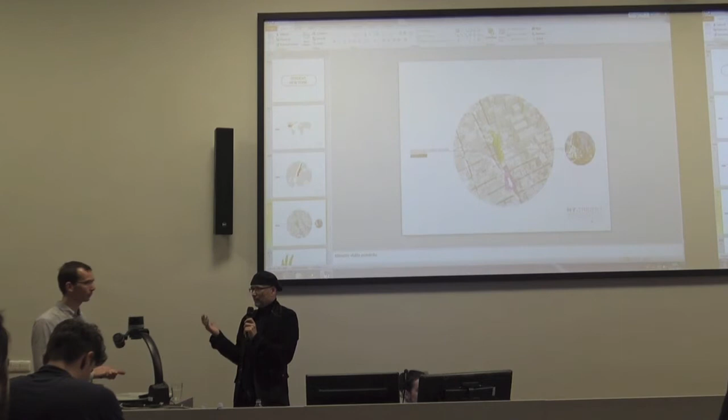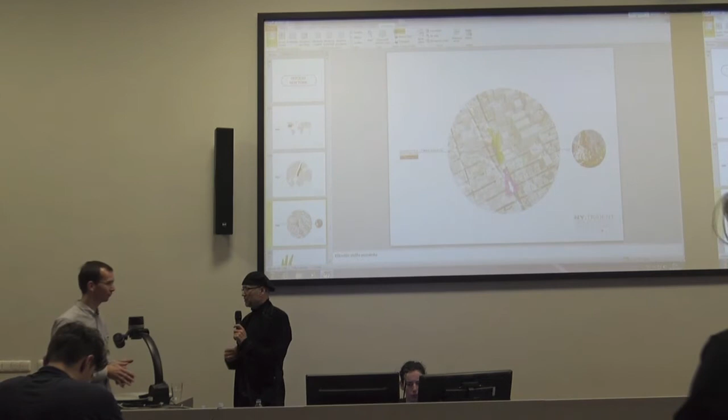Maybe you invented a Baukünstlerkollektiv system, or it was maybe in the 80s or 60s, because last year our friends wrote about this idea from Germany, this Baukünstlerkollektiv from Berlin and so on. Yeah, it was mid 90s. It's one of the first big projects of the Baugruppen. The other one was Kraftwerk in Switzerland. And then it came to Germany, and now they're doing a lot of projects in Berlin and in Hamburg, overtaking Austria 10 or 100 times. So they are doing a lot with this Baugruppen. Yeah, okay.

No, it will be from the beginning. Yes. It's just... Is it this one?

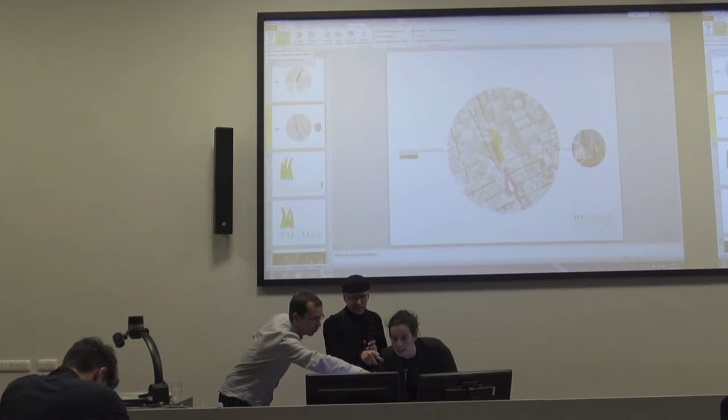Good. So, another 5 minutes, then we can finish. We did this skyscraper as a kind of advertising for us in 2 or 3 days. It's so easy to design a skyscraper because you have a big volume, and then you can shape it into fingers. You're turning your fingers so that you can see in between, and at the end it leads to this form. And the interesting thing is when you go around this form, on every side you have a really big difference of shape and sculpture.

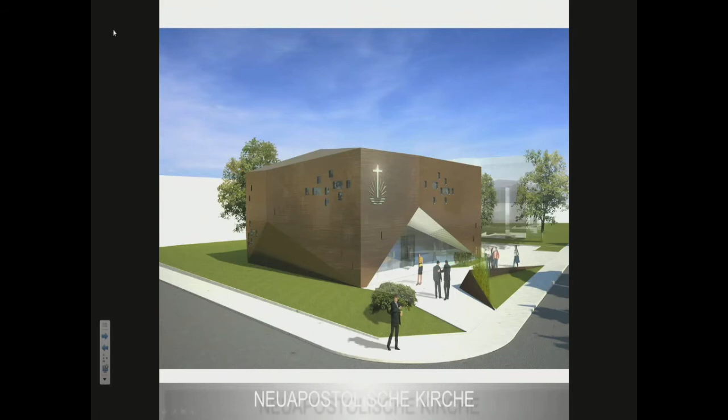And this was then in real life. Here they are, a little bit different to the normal shape of the skyscrapers there. Then we have some competitions. This was a competition we didn't win. All of them we didn't win. It's for a small church, which was then done by a colleague of ours. This was for the Interspar.

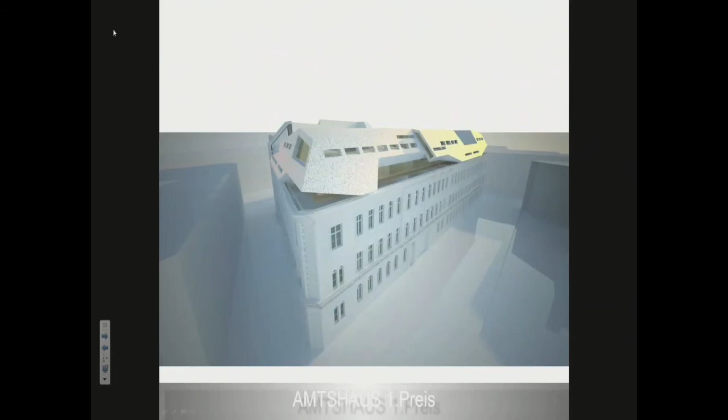This is a project that we won in 2008, and you know what happened in 2008? The bank went bankrupt, and we won the first prize, but we cannot do this. So maybe in a few years it's possible, but they don't have the money now. So this was the shape for an office building. This was also a competition for a medical center in the 22nd district.

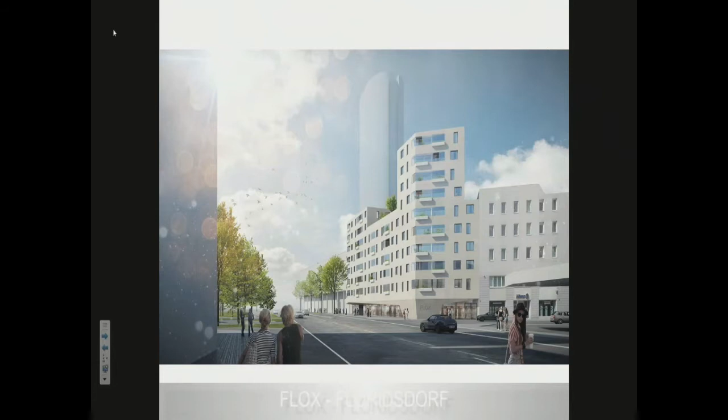This is a competition in Hanover. In Germany, all the buildings have to be out of bricks. But on the other hand, we like bricks. I would like to do this in Vienna, but in Vienna it's too expensive. So that was the reason why we opened an office in Hamburg, so we can work now with bricks. At the end, somebody won this project, which was really bad, I have to say. You can look then in the newspaper. This was a competition in Vienna. It's not a skyscraper, but a little bit higher building.

And the letters are out of 20 centimeter styropor, so it means working with the styro cutter for 5 or 6 hours to do one letter for the whole facade. For example, the E, 8 hours, because there are so many E's in German. We started with E, and at the end, the people were standing there trying to solve the sentence. What could it be? And at the end, it was then clear. It was an invitation for a theater group that was working in our space.

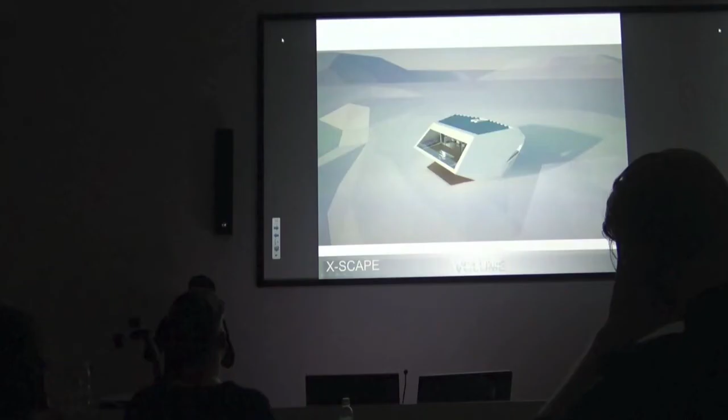This is a project which we're doing now in Carinthia. It's a small house. It's a single-family house, and the problem with a single-family house is the energy consumption. So if you are trying to get the energy plus or zero energy house, you have to do a lot. And that's what I'd like to show you, how it's going to work.

This is the house, and you have salt pipes in the earth. Today we are working more with air because it's cheaper. You need a heat pump, which is raising the temperature. Then you need solar thermal panels for the heating, for the warm water in the summertime. And photovoltaic, because with the photovoltaic elements you can power the heat pump. So if you have a system like this, you're independent from any other system, and this is how it's going to look.

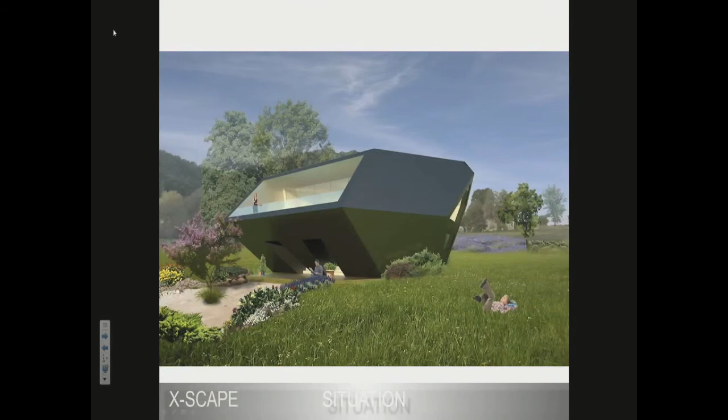Not exactly the same. We have changed it a little bit, but not so much. On the upper floor is the living unit. So there are two rooms behind here, and this is the living unit. Down is the technical area and some office area. This is looking into the inside then. It has a very good panorama because there are the mountains lying behind, so somebody called it the panorama machine.

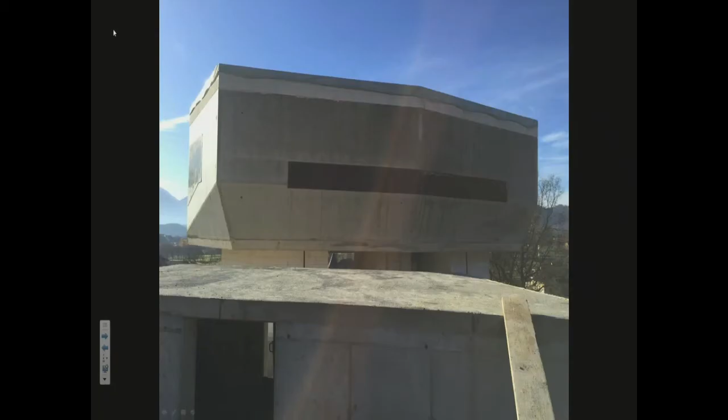Yeah, and that's how it's going to look now. It's under construction. We hope to finish it in one year. We hope so. And yeah, that is my last project which I would like to introduce to you. And I think we're now at the end, really.

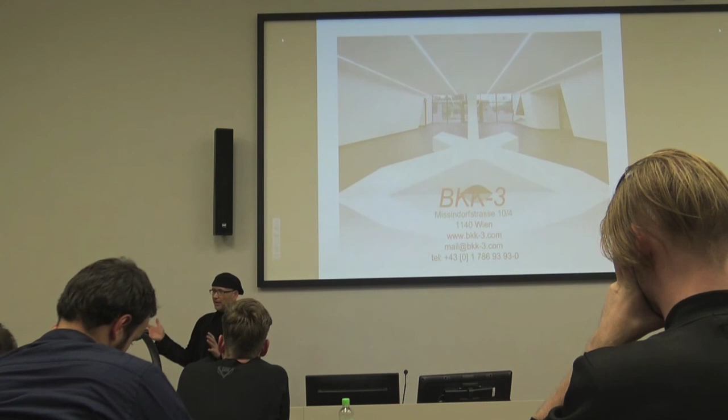So the project is not done after the Polier plan. Then you have to go to the Baustelle, the construction site, and discuss every topic with the company. But I think you can see this quality then. All the architects are investing a lot of money and power into these projects.

Here, do you have any questions? I told you too much. In which program are you working? Not me, but

So we will go across the river and have a beer, if you want to join us, or if you have other questions. You know where we are? I don't know. Yeah, it's really close. You may see it from outside. It's really 50 meters.